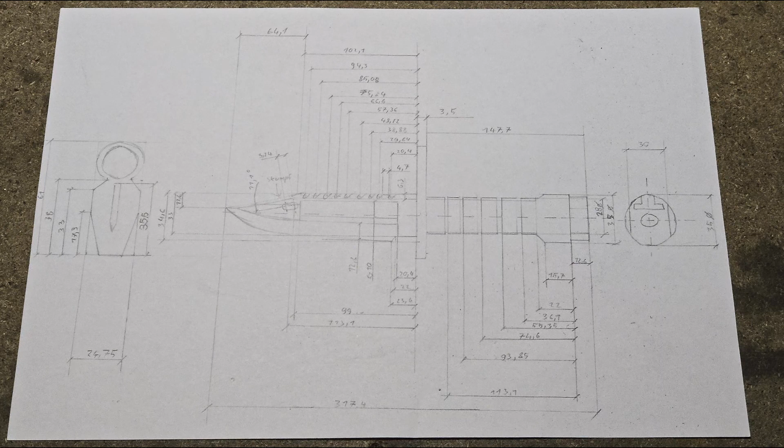And like most other knives, this one starts out as a sketch. You can see I didn't leave anything to chance with this one. I basically measured everything.

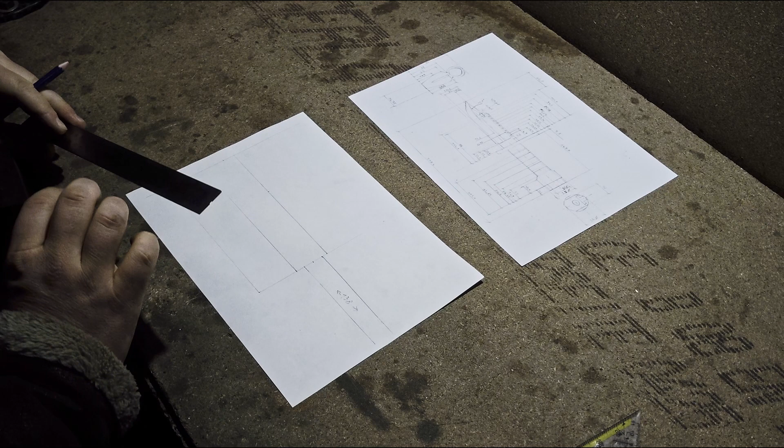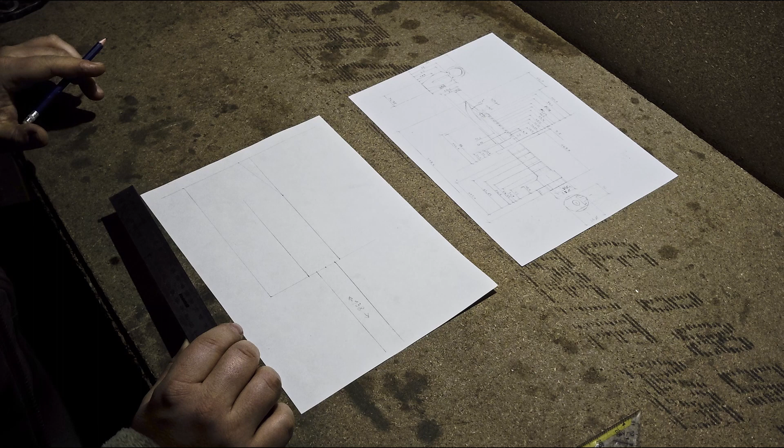Now you usually don't see me during the template making process. But I thought, since this is a very picture frame size template, I might as well show you what I do. This doesn't include the several hours it took me to trace all the measurements for the sketch, but this is also quite an important step of the entire project. Now here we have an angle, but the blade doesn't seem to be a straight line, so I will just freehand this. And then I will freehand this again when I'm at the belt sander.

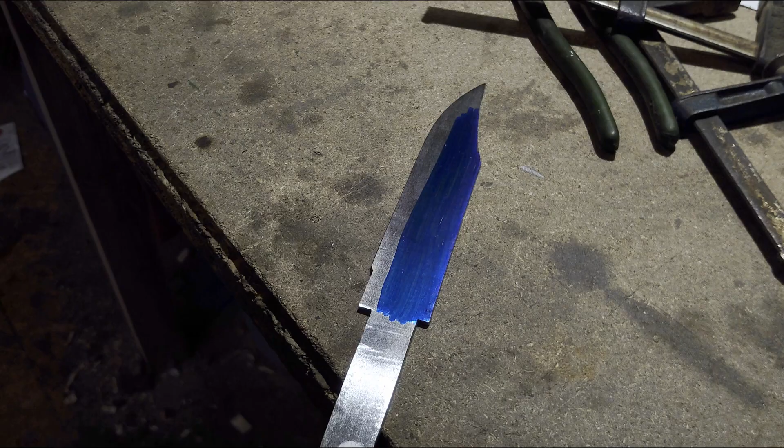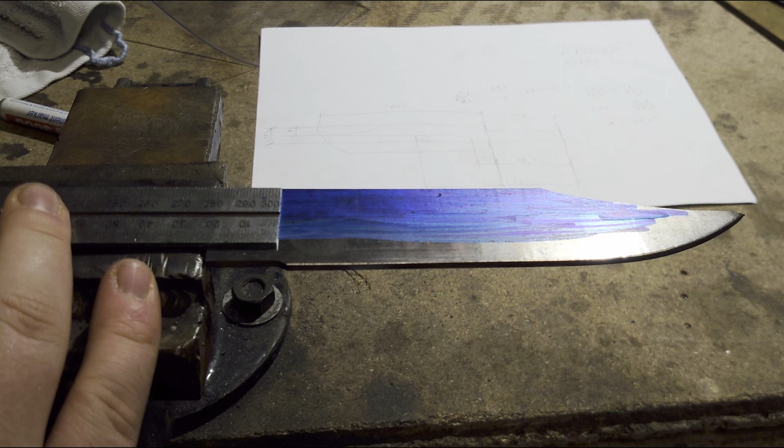The blue color makes it easier to see the scribe lines later. Since I'm using the backside of the blade and the nub end of the tang as reference for my distances to mark out the fuller in the middle of the blade, I had to do some quick math to actually find out the measurements, because the way it was, I couldn't really work with any of the measurements on the main side. And by doing it like this, I can guarantee that the scribe lines will be in the exact same position on both sides.

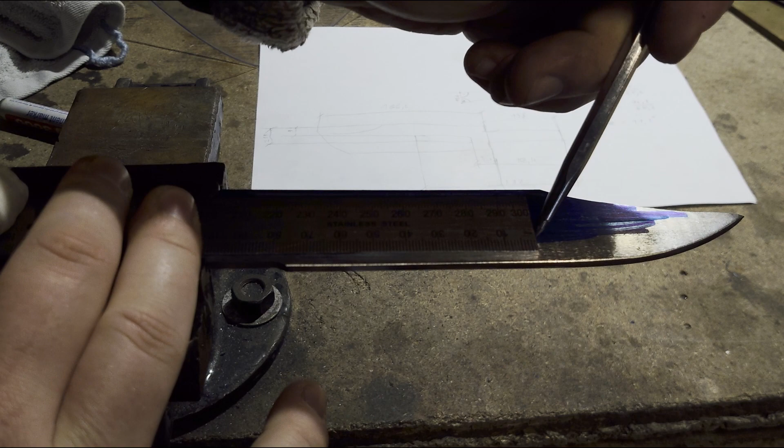There isn't really a good angle to film this, but what I did, I clamped those two pieces on the blade to restrict the way the sanding belt of the power file can move left to right, because these have a tendency to spring out of alignment. And with that, I will basically just carefully grind in here, and that way I will try to get the fuller in.

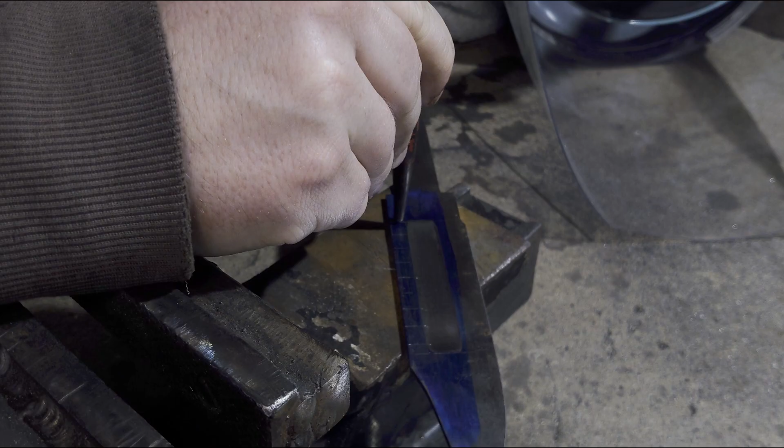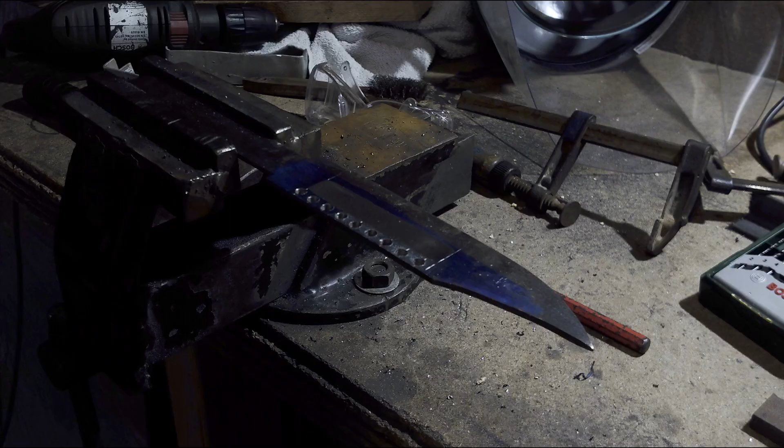Trying to do this so that you can actually see something. What I'm doing right now is marking all those little serrations. Now I am center punching all those little serrations. And now I'm drilling the holes for the serrations. Now we just cut out those little pieces and then the serrations are done.

And after repeating all those steps for the hole in the blade, don't know why that's there, the blade is now completely shaped, except maybe the blade bevels, but just like last time, this piece is so thin that I don't really get anything out of doing them right now. So the blade is now ready for heat treatment.

As with the last knife build, I will 3D print the handle, but this time not from flex filament, but instead from PLA, regular stuff. So, as per usual, we will put the mesh in the background.

Now, what we do this time, since the handle is round for whatever reason, I will use this piece, go to the center point. The diameter of the handle pieces is 28 millimeters, so we will go 14 millimeters up here. And the width of those is... let me hammer on my calculator for a second. The entire width, length, height, or whatever you want to call it is 19.25.

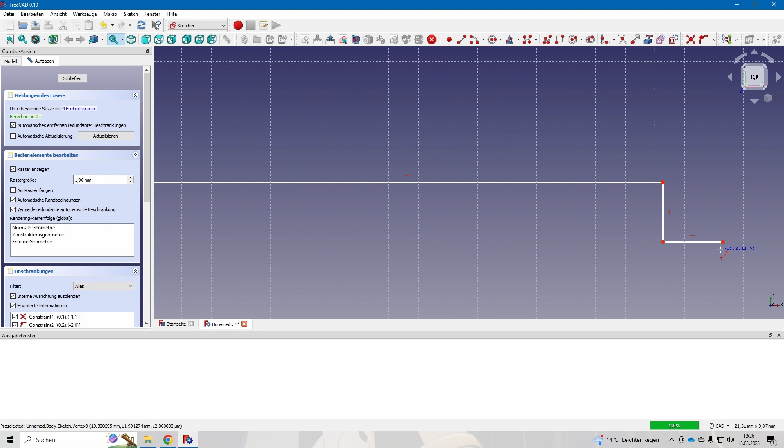So I guess I will make it 19... 17 point... oh, I don't think I can go to such tiny increments. Okay, so we will make it 19.3. Now we will go in 2 millimeters deep, then do the remaining 2 millimeters. Zoom out, grab this one.

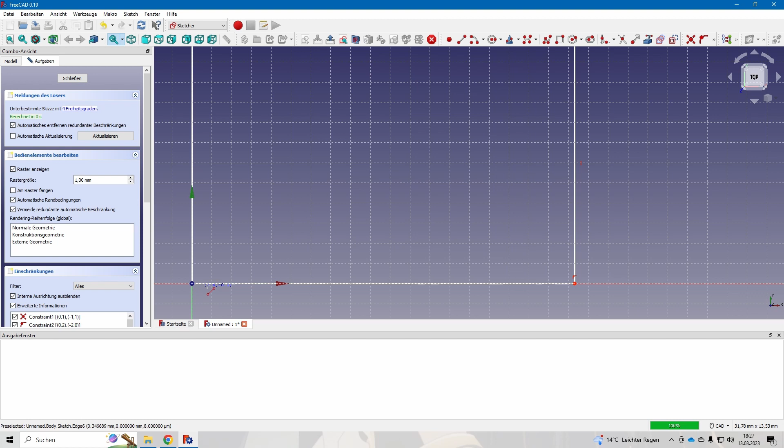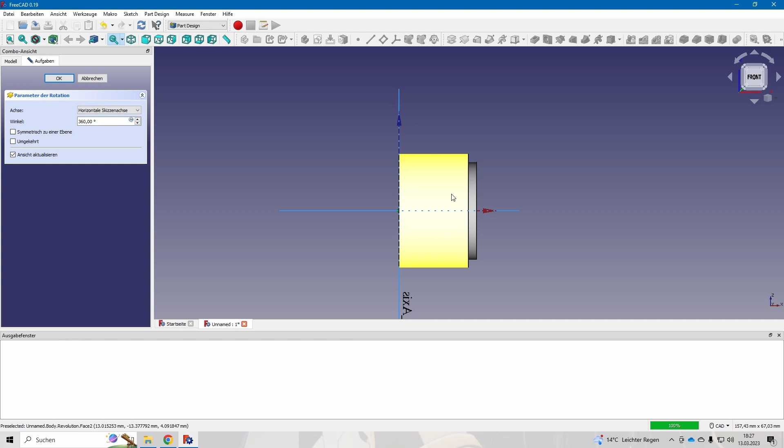Now the angle is more important than the distance, 90 degrees. And we go back to the beginning, and now we close this. Then we press this one, choose a different axis. And there we have one of our segmented pieces for the handle. I will need 4 of those. But they're not done yet, because I have to include a handle hole.

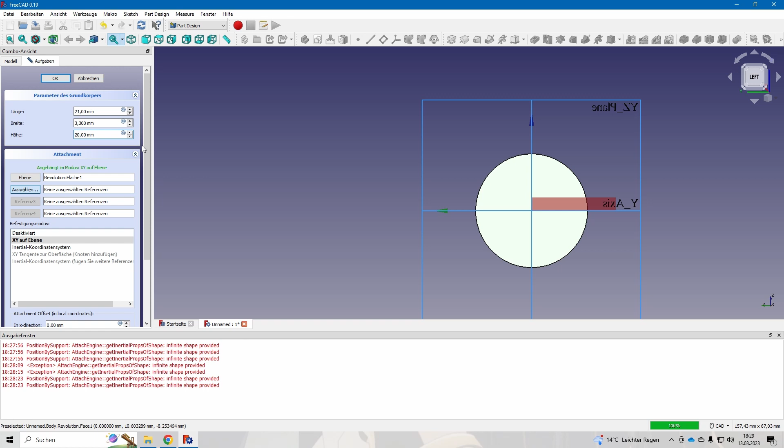Now it works. And now it doesn't work. Maybe we have some weird... okay, just the orientation of the piece is a bit weird this time around. Okay, length is... I will put the length as 20, but even though I only need... what was it? 19.3. The thing is, I see, I'll show you in a second.

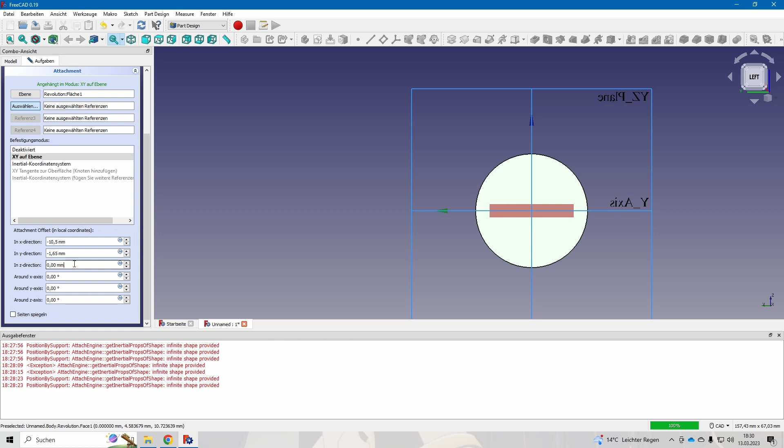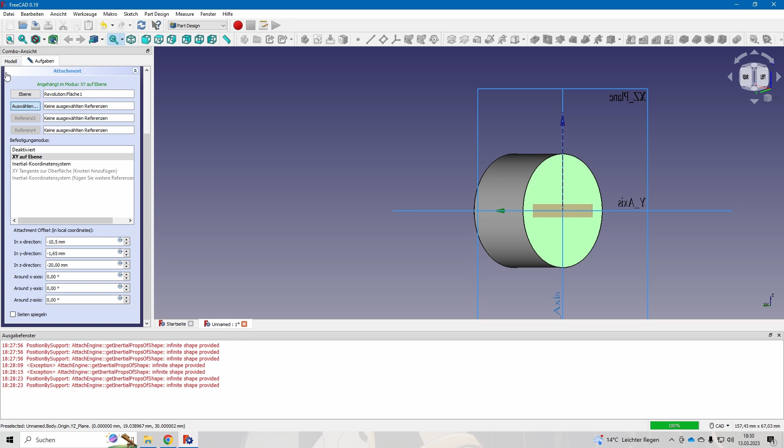Oh yeah, that one doesn't work either. So yeah, that's the thing, this part here doesn't allow for a tenth of a millimeter increments, so I can never get it perfectly into position. Even though I believe last time it worked. Yeah, now it works. Weird, this one was always weird. But since we put the size to 20... wrong 20... now it works. So now we can press the OK button, and we have one of our segments.

Now there are two more things I need to mention. One is that the filament I'm using is white, mainly because I don't have any in that weird spatter tan color, but I will just paint it afterwards. The other thing is my original plan was to make the handle out of wood, which would have been perfectly fine as well, but amongst the many reasons why I didn't do that, the main one is that I'm just extraordinarily lazy, and this is much easier for me than to make the handle from wood.

Here we have our handguard piece that just barely fit on this leftover piece of brass I had lying around. And now I will carefully cut that out, because if I mess up here I don't have any more brass lying around. Would be bad.

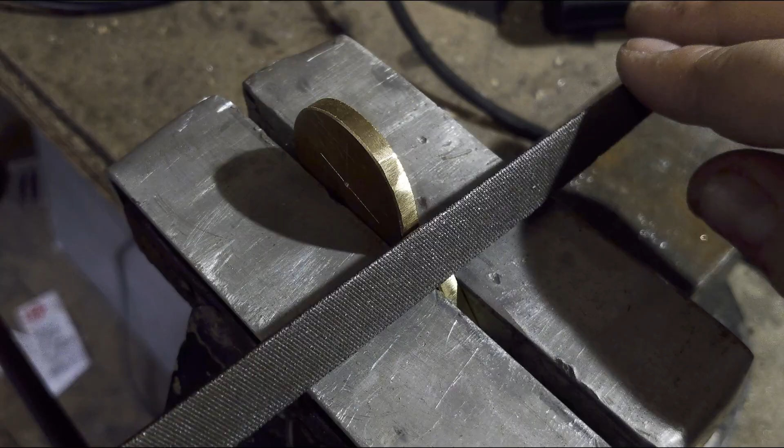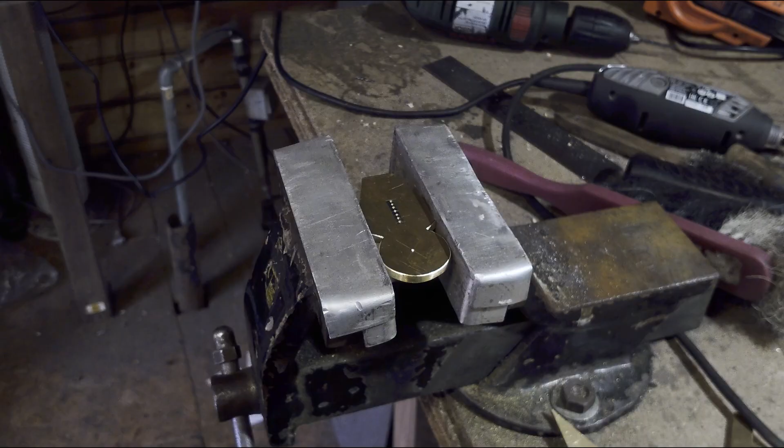Now that the handguard piece is shaped, I can drill the holes for the tang to fit through.

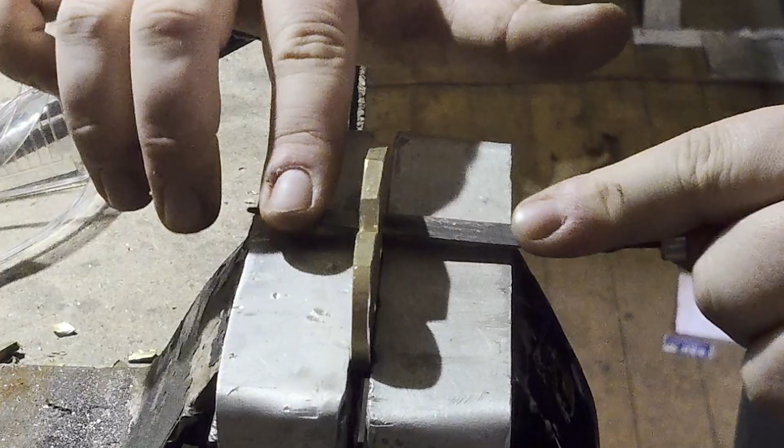After polishing, this piece is now crazy shiny, but by the time the rest of the knife is done, this should have aged a bit and then look quite right.

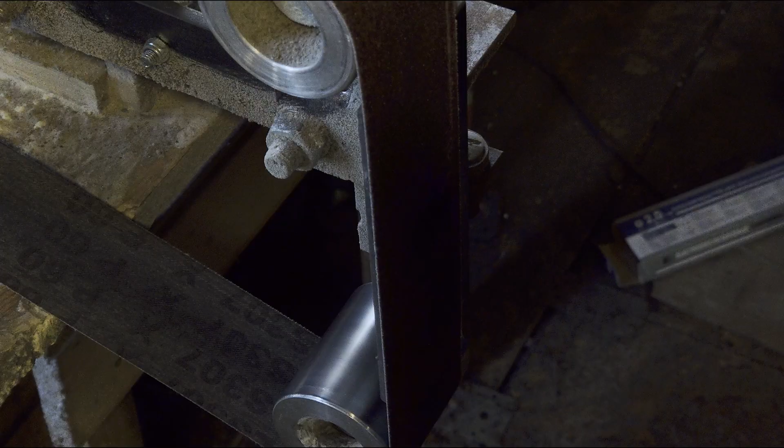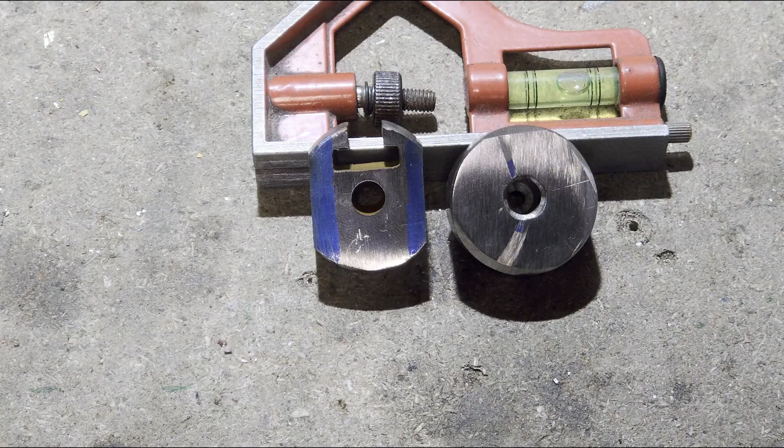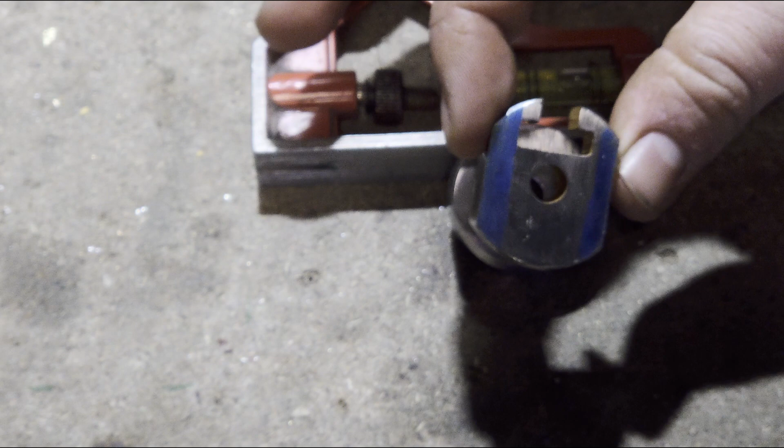For the pommel, I'm using a special method that I first thought of while making the burial blade. It's basically so that I can get this profile piece made. It would be impossible for me to make this shape if I had more metal behind it, so there will just be welded together like this. Maybe a bit more straight than that. And that's how the pommel will be done.

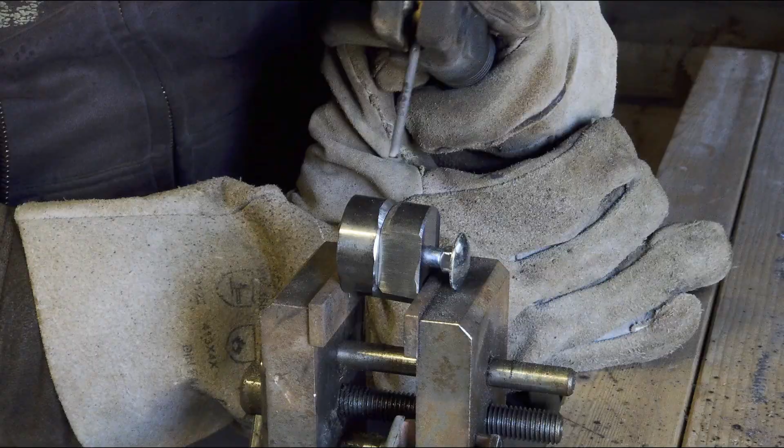As I was preparing the heat treatment process, it started to hail a little bit. Yeah, you can see that pretty well. Now, but that's not the problem I want to talk about. I did some measurements with the blade, and the problem is the fuller has gotten quite thin. I think we're under 1 millimeter, and that might be a problem. I'm worried that it might burn through during me trying to harden the blade.

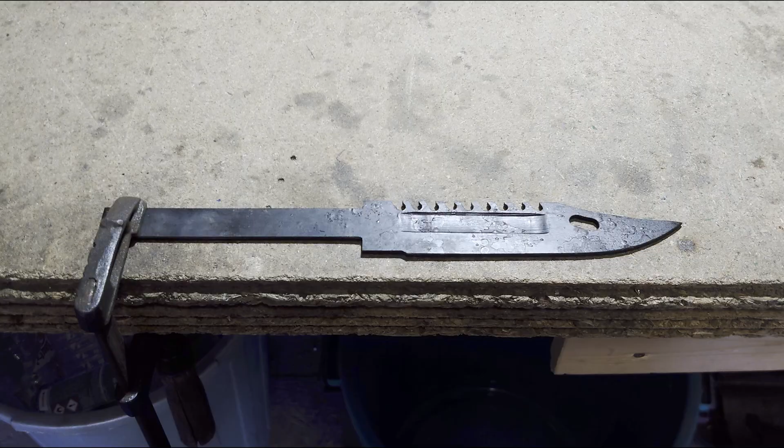Now to get this inside and then get my camera inside. And this is a couple of minutes after I'm done with that. The blade's now heat treated, and the next step is to polish the entire thing. And I decided that I will start with the fuller.

Well, this is a problem. While grinding, I noticed this tiny spot in the fuller where it broke through. Now I still had hopes that it was just one tiny spot, that I could just patch a bit of weld on it, but the entire area around it is quite thin, so yeah, that's a problem. Because now this piece is completely ruined, I can't use it anymore. Now I could either scrap the entire project, or I try to redo the entire blade with this tiny piece of steel that's still left.

It's important that I use this one, because it's the same piece as this, and all the fittings are already made to the dimension of the tang. Now, there's one more problem with that. It's a bit too short. Now, what to do? I guess I will just forge the tang out a bit, forge the tip out a bit to get the length I need.

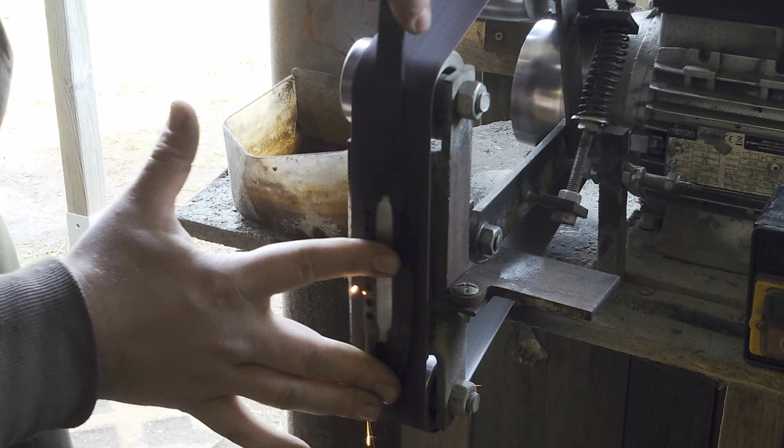I have reactivated my old budget file guide. With that I can at least try to get a clean plunge. Now, contrary to last time, this knife doesn't have a parallel back and front, so I can't just stand here lazily and move it like this. I will have to try and very carefully keep the right angle for the blade bevel.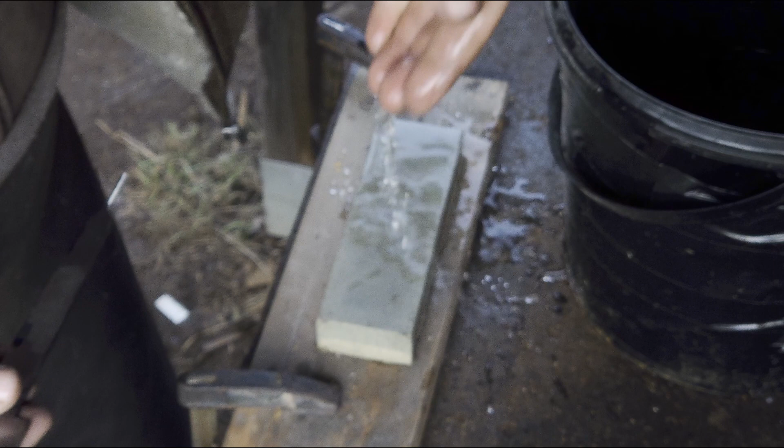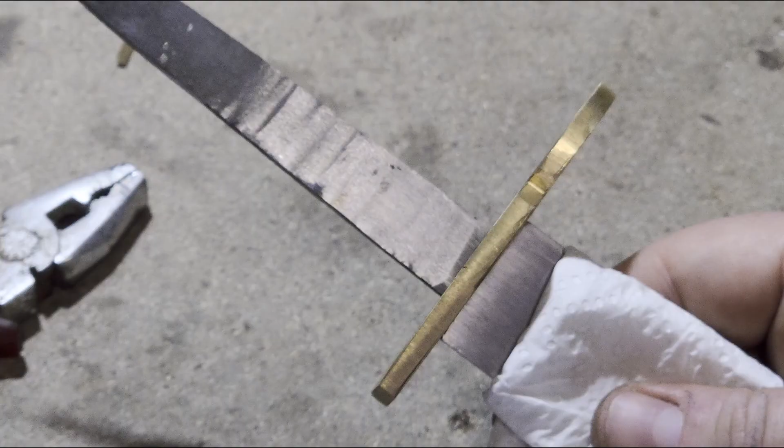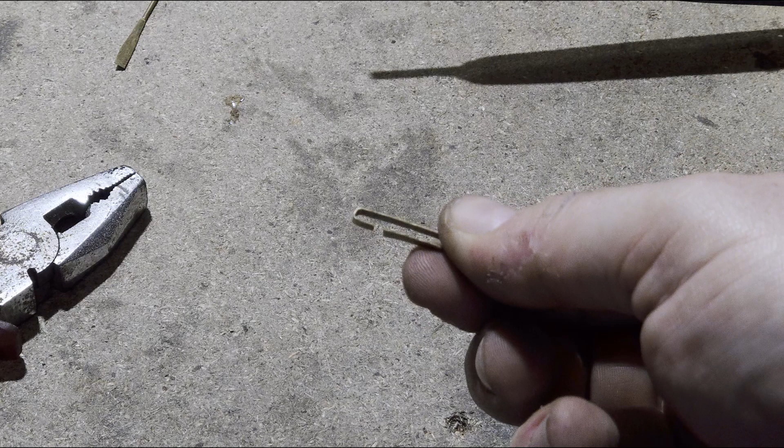There's one other issue with the fact that I had to reforge this blade: the slot for the guard now isn't really fitting. I guess obviously now that the handle's not on, it's rattling, but also while the handle was on, it was rattling. That's why I created this collar piece, which will be squeezed in between the blade and the handguard, and then it hopefully doesn't rattle.

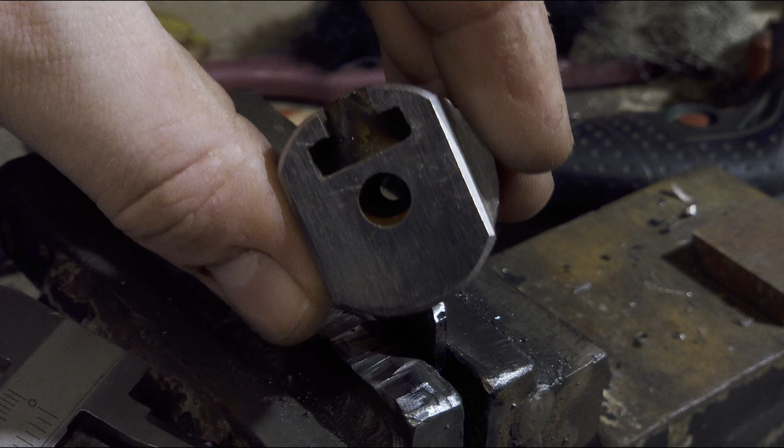There is this one piece that isn't on the knife in the original 3D model. Whoop, almost dropped it. In the original you have the butt end of the knife with just basically this hole is just a dead end, just flat down there.

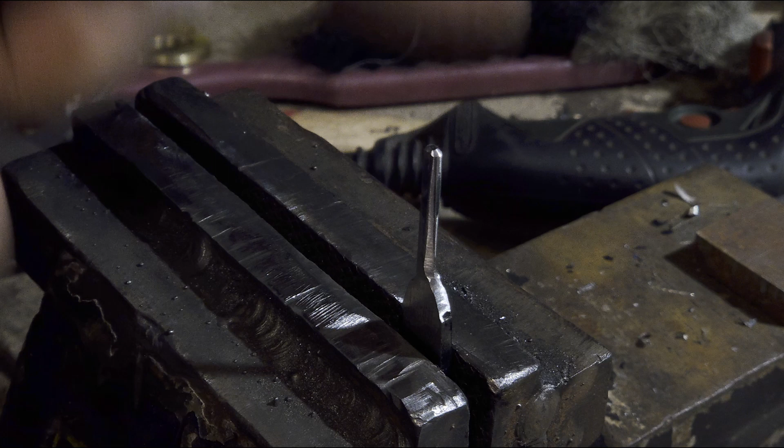But I decided to throw everything off the table. I decided to make this little pommel nut that screws directly on the tang of the knife once I've cut the thread. And then it will hold the entire thing together, because I have trust issues when it comes to glue.

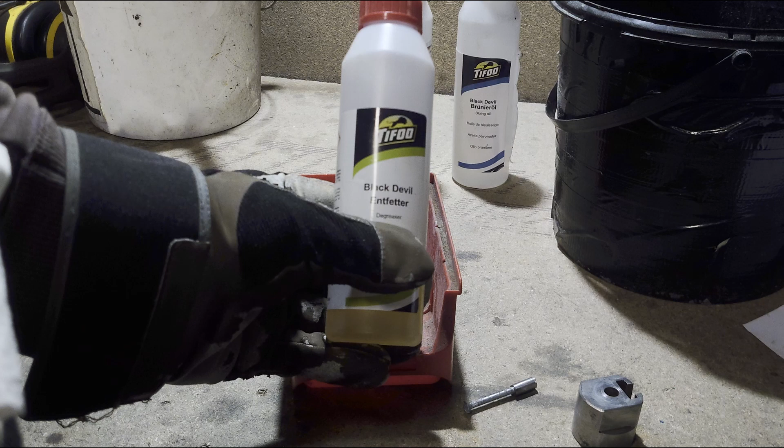Coincidentally, the last step on this project as well is to blue the parts. First off, I will use some degreaser to get all the oils off the pieces that need to be blackened. This is for one the pommel nut. This thing offers much resistance to being degreased. And then we have the actual pommel.

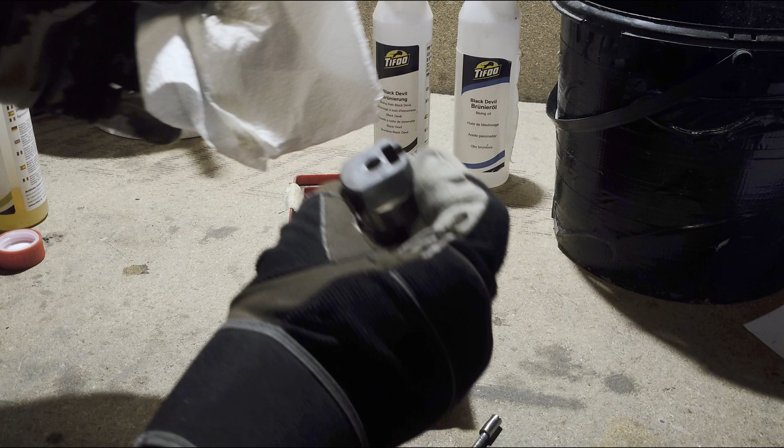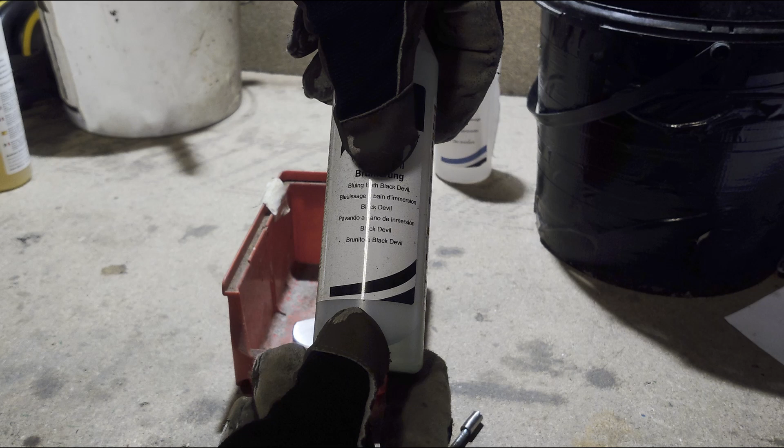Next step is the actual bluing solution. Bluing Bath Black Devil. I also just realized that the English name is on the bottle. So, my most minimalistic approach at getting this stuff out of the bottle. Do you see what I'm doing? You can't see. Great. Now they just get hit with some bluing oil and then they're done.

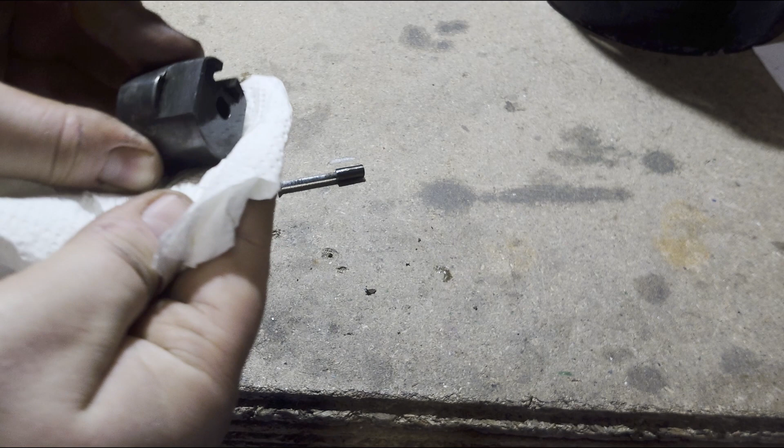And now the only thing left to do is the final assembly.